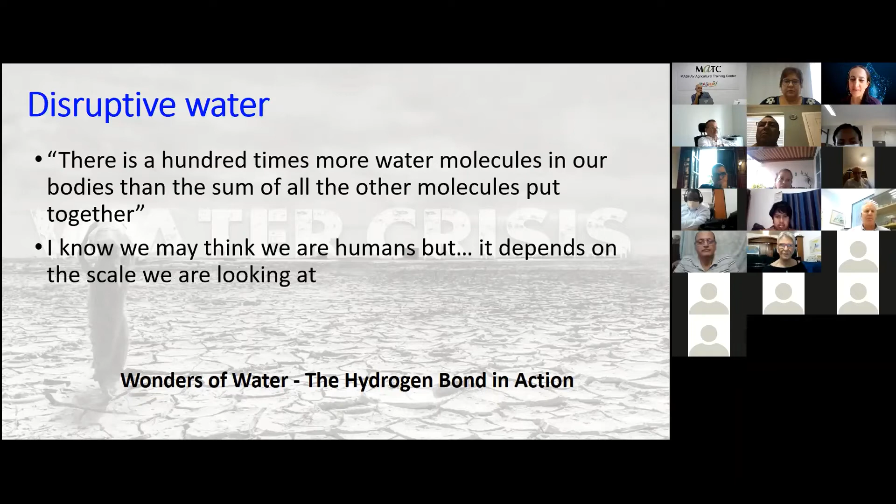So how is this related to water technologies? I would like to go through some path with you to discuss how all these things are actually related when we think about water innovation. So, what is water?

And I'm sure that if I ask the audience here what is water, probably most of the people will say H2O, right? I think so. But I would like to show you something else very soon, and I will return back to the answer to this question. And water actually has endless dimensions. It's a beautiful thing. But when we think about the approach to sustainable water, what does it mean?

Well, everyone is talking about getting out of the box. But again, what does it mean when we think about water technologies? What's getting out of the box? What is innovation in the water arena? Just assume that you can actually imagine and dive into the three-dimensional concept of water and feel, understand, and imagine what water is. Can that actually help us to understand how to develop better water technologies?

How is a single molecule of water related to the millions of water molecules that we have when we drink a glass of water? How is it related to the concept of thinking of water? And so water interacts with each other through hydrogen bonds, and water is a universal solvent, and also water has many types of capabilities. So how do we harness these qualities in order to purify water? And this is actually a really big question, because when we talk about water innovation, what do we actually mean? What is our goal?

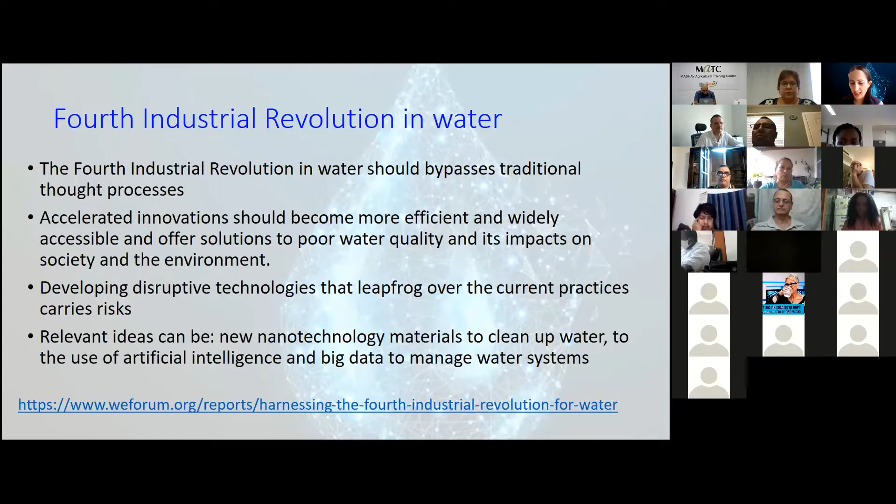But there is a problem. Why? Because I'm a scientist, okay? I research in the lab, we do science, we publish papers, and we can invent many new materials and many new technologies that we think could be implemented. But if we look at reality, most of these technologies are not scalable, not affordable, and not relevant to point of use applications where they're mostly needed.

So what does innovation mean? Well, when I think about innovation, I think that we need to talk about reactor design. So how do we take all these scientific concepts into a system? And this is where we have a huge gap, okay? We have a really huge gap.

I recently did my sabbatical at IIT Madras in India, and I quoted something that Professor Pradeep said, that affordable clean water is a problem of advanced materials. But I would say that it's not just a problem of advanced materials, it's also a problem of all of these advanced ways of thinking, integrating them in a smart system, in a system that can actually work. So these are the gaps that we need to solve.

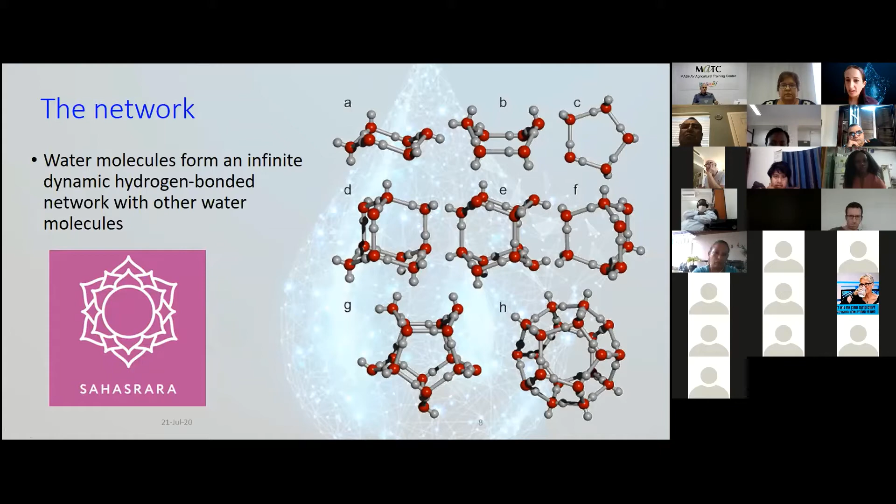Now, you remember that I asked you, what is water? Well, we're used to saying that water is H2O, but if we look at all these drawings, water is numerous H2O molecules that are bonded to each other through hydrogen bonding. And when we drink a glass of water, we don't drink H2O, we drink tons of H2O molecules bonded to each other, and water is the universal solvent. So all the different chemicals that pass through the water dissolve inside the water. So we know that all this happens, but how does it help us to purify water?

Well, let's look at the human perspective. When we think about humans, we can drink only a very limited quality of water. So most of the water types we cannot actually drink. So what does it mean when we think about water technologies?

So what do I plan to talk about here? It of course depends on the time and how we proceed. I want to talk about contaminants in water, and do we have a chance to really purify water? I want to talk about the impact of climate change on water quality.

And I also want to talk about new technologies that are related to sewage treatment and data science, new materials and new light sources. So this is my plan for today.

So I'll just move. So when we think about contaminants in water, well, when we drink a glass of water, and I'm showing you this glass of water again and again, but what do we actually have in this water? Well, water can be transparent, but it can actually possess many things like arsenic and pesticides and nitrates and hormones and fluorides and pharmaceuticals and microbes and viruses and bacteria, protozoa, and the list doesn't end. So do we actually have a chance of purifying water in a way that can actually be good for us?

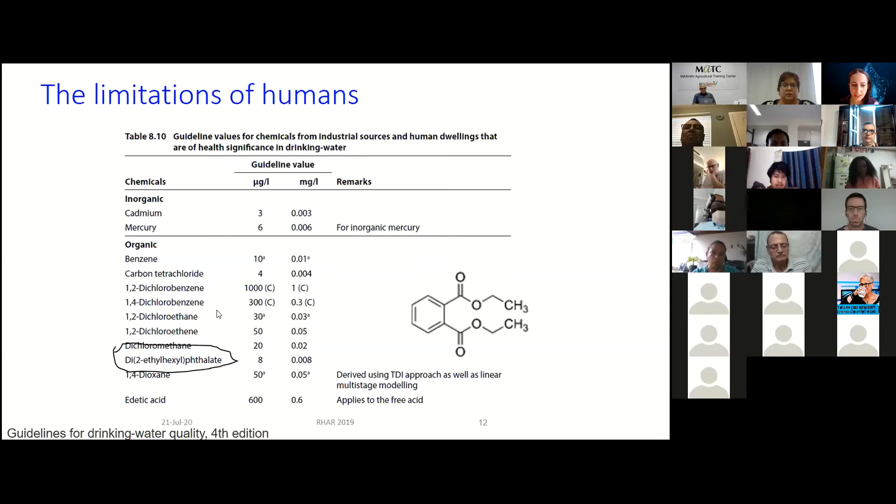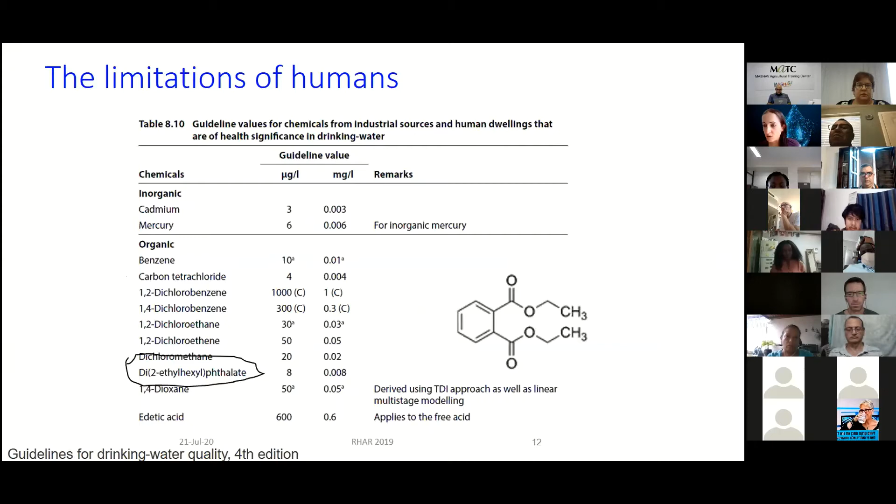But look at this chemical. So do you see this chemical? It's called phthalate, and this is how it looks. But this is only one out of an endless list of chemicals that are not supposed to be in water. And actually, the concentration is supposed to be 0.008. So where do we find this chemical? Well, we find them in open dumps.

And what happens in open dumps and solid waste, even managed solid waste facilities, we actually have chemicals that leach out of the garbage, and they infiltrate to the groundwater. And we all know about plastics, right? So when we talk about plastics, most of us are worried about the plastics, the microplastics, the nanoplastics. But what about the hidden plastics, those dissolved plastics that actually dissolve from these bottles? Okay, so what about these?

Actually, no one talks about it because there's not a solution for all those chemicals that leach from those plastics into the water. And the technology to remove them is very expensive. So what happens with all these things that are really a major concern, and these chemicals are potentially carcinogenic? So what happens with all this? And it's not even measured, but we know that the plastics that we drink from actually result in more of these chemicals in the water. So there's a huge process.

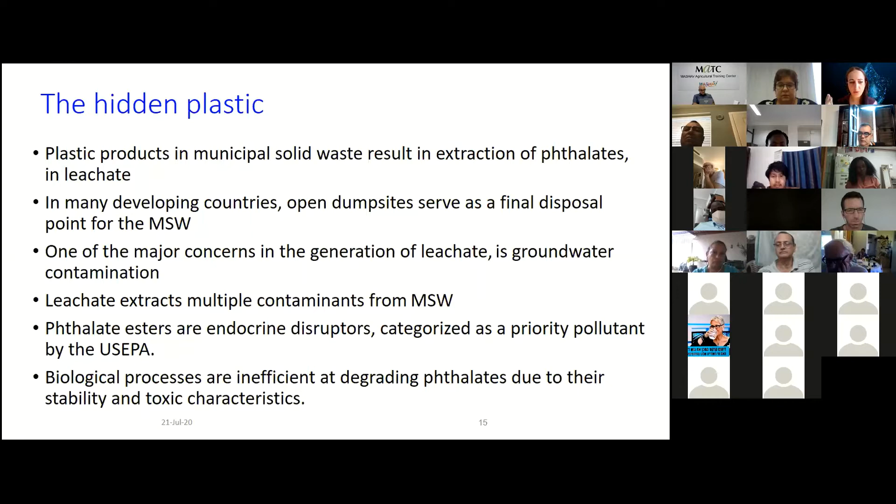And when we look at the technologies to treat those chemicals, they're very expensive technologies. So we need to use, for example, advanced oxidation, ozonation, reverse osmosis, all these big names in order to remove those chemicals from the water. So we are actually in a big problem, because I'm not talking only about the bacteria and the viruses, I'm also talking about the chemicals that are present in the water. And why do I say that we don't have a chance? Because what are the chances of removing all those contaminants from the water? So that's a big question mark.

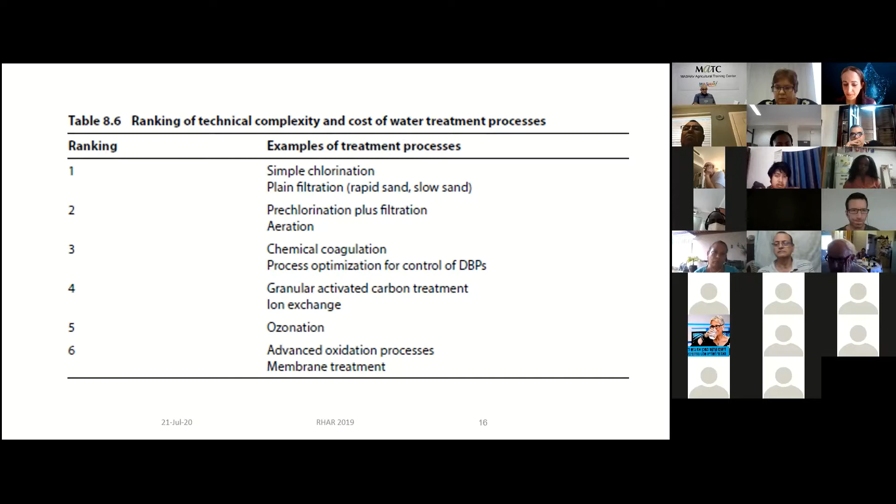And I want to talk now about a different aspect. And this is in light of global climate change. When we talk about climate change, we talk about many things. We talk about water availability. We talk about the climate itself. We talk about biodiversity. But we don't talk so much about sewage and about water quality. And I just want to show you a few things that we need to look at when we deal with water.

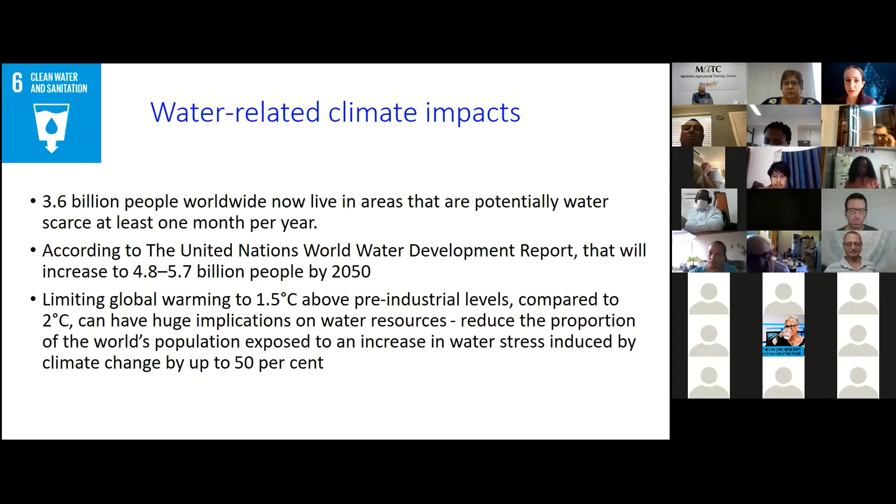So how do we manage water in light of these issues? And what do we need to do to be more water resilient in light of the changes that are happening currently in the world? And so I actually want to emphasize the issue of quality. Throughout this lecture, I will talk mostly about water quality, not water availability, because water availability is something that we notice. We notice the storms, we notice the floods, and this relates to water availability.

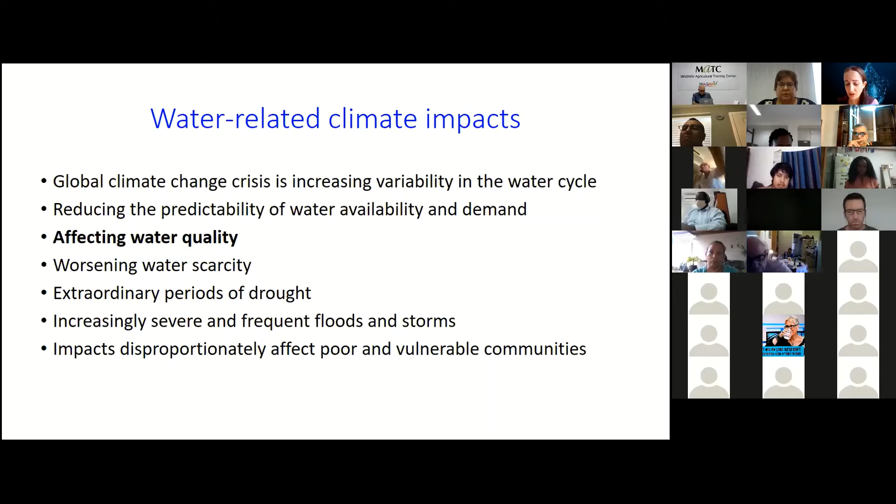But my argument is that when we have less water, the quality is actually worse. So how do we deal with water quality when we know that humans can drink only a really narrow range of water quality that is healthy for us? So what happens in light of all these issues? Definitely climate change will have an impact on our water quality. And I just want to look a bit at wastewater treatment plant design.

So we know that greenhouse gases are emitted during the treatment of wastewater, and these relate to carbon dioxide, methane, nitrous oxide, and all these have a global warming potential. If we look at the global warming potential of carbon dioxide, methane, and nitrous oxide, the ratio is 1 to 28 to 265. CO2 is emitted from aerobic respiration, and N2O is released during nitrification and denitrification. So all these things are happening in a wastewater treatment plant, and we have release of all these gases.

And we really need to look at the impact of the release of those gases in relation to global climate change. So this is the case in the Hudson River in the US, where they found that when they have excess sewage and the sewage reaches the Hudson River, they have far more greenhouse gases, CO2, emitted from the river. So this is one thing to think about.

And if we look at different things, when we use wastewater to irrigate crops, we increase the surface area of the wastewater in contact with the atmosphere. And with this, we also have release of gases to the environment. So these are things that we must look at. We cannot neglect the impact of sewage on water quality, but also on the release of greenhouse gases.

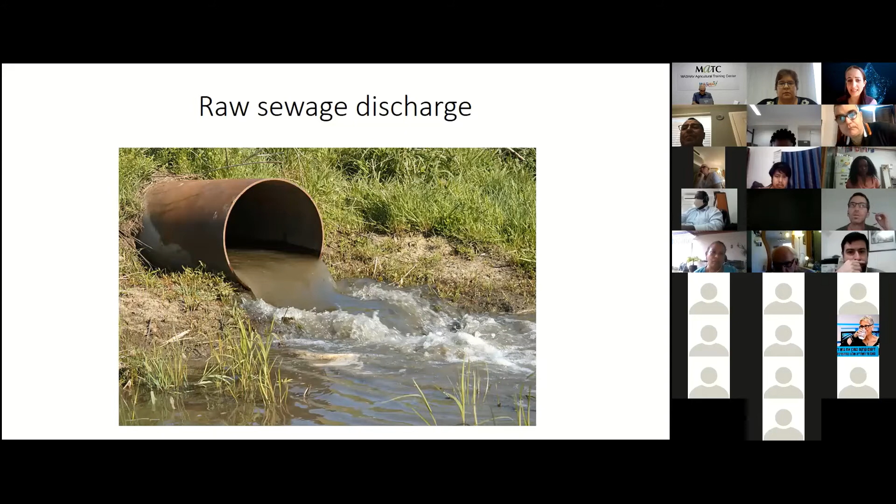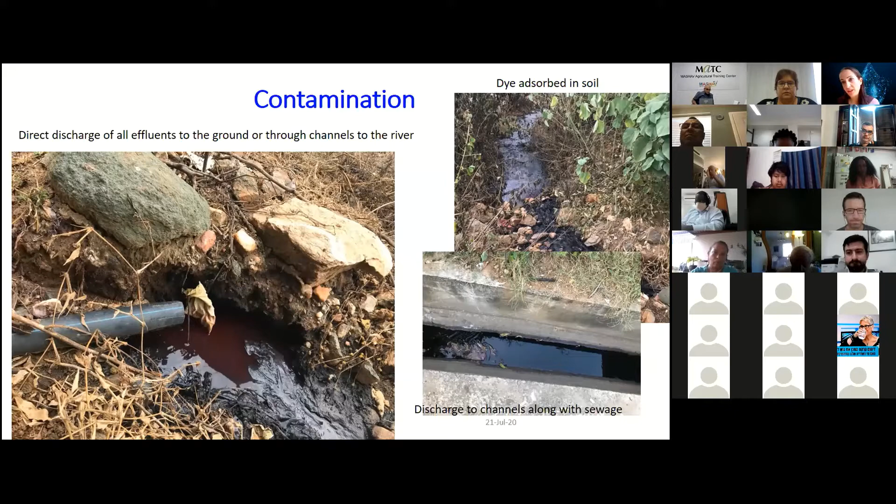And these contaminations are very much happening all around the world. The sad statistic is that almost 90% of the sewage is actually not treated. So it's discharged to the environment with a huge surface area and results in release of those greenhouse gases to the environment. In addition to that, there's also the issue of greenhouse gases in manholes.

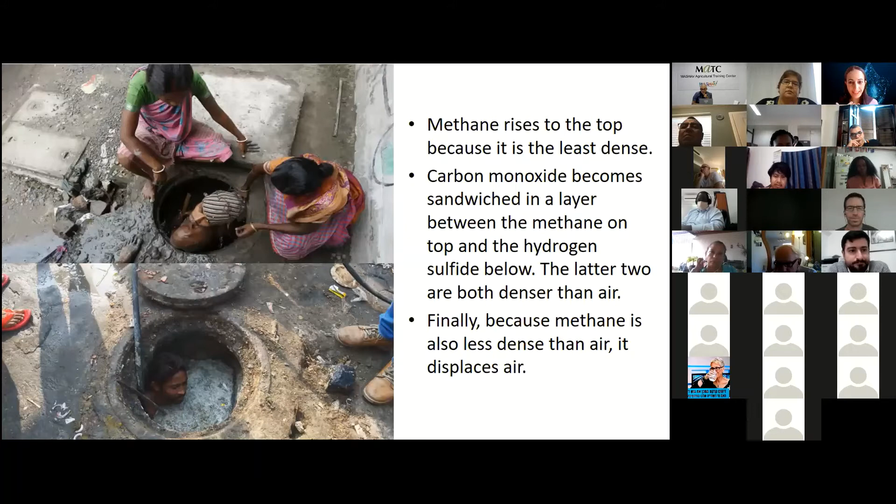Basically, methane rises to the top because it's the least dense of all the gases released from sewage. Then carbon monoxide, so we have methane, then carbon monoxide, and then hydrogen sulfide. So we have all these gases layered in sewage manholes, and with methane, for example, it displaces air. And so when methane is being breathed, it can result in human death.

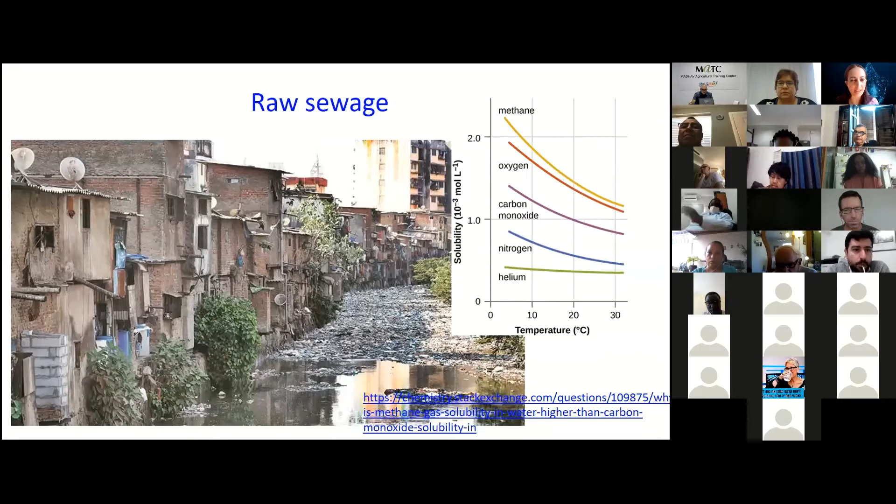And when we look at raw sewage, this is a housing area, and this is raw sewage mixed with water. Again, the gases released here are really potent and are a result of sewage that is not being collected, not being treated, and released to the environment. So we do need to think about these things. When we talk about water, water is never only water. Water is also sewage, and we need to look at it when we talk about water management. It's supposed to be always water and sewage management.

So I want to just show you a small example of how wastewater treatment plants can result in better management of their sewage. For example, if we look at a standard activated sludge treatment plant, it actually consumes energy, okay?

So the energy that is consumed in a sewage treatment plant is about 3.2 kilojoules per every gram of COD, which is the chemical oxygen demand, and this is a parameter that relates to the organics in the sewage, okay? So potentially the organic compounds in the sewage have potential energy that can be harnessed to treat the sewage instead of using fossil fuels. So this is a way to reduce the release of CO2 and other gases to the environment.

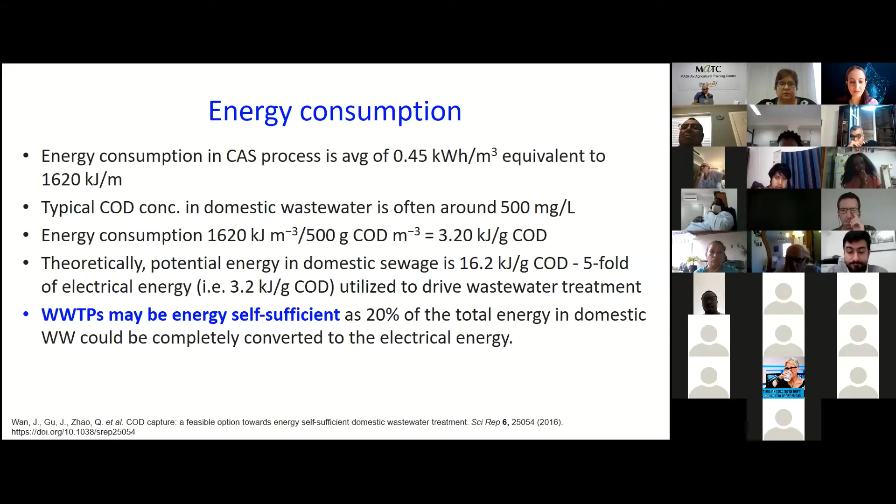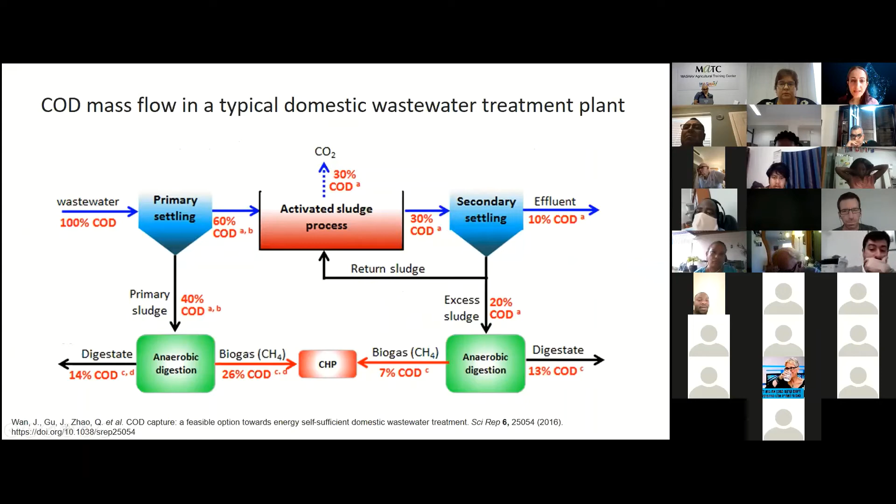And just by looking, for example, at this, I'll just talk about it really shortly, just to emphasize my point, even if you're not a sewage engineer. So this is a standard sewage treatment plant. And we can see here that we have 26% and 7% of the chemical oxygen demand in generation of the biogas, of the methane. So we can actually get energy by generating biogas from the sewage, okay?

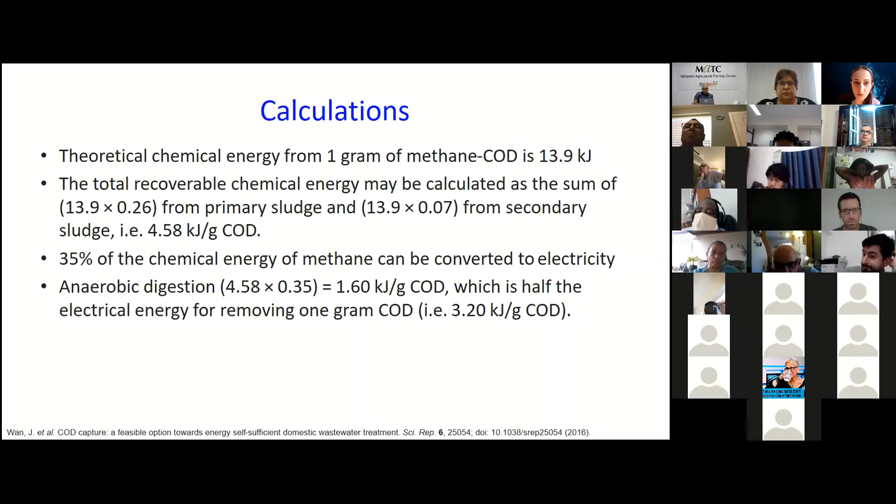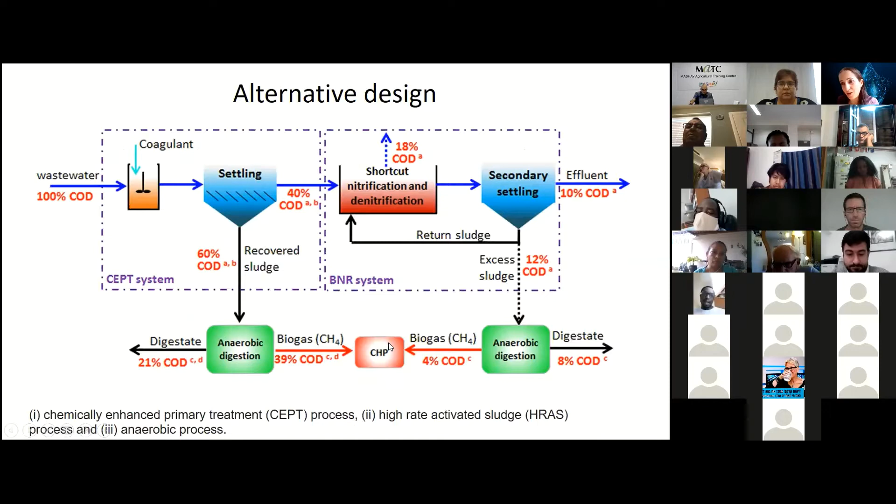But if we improve our sewage treatment plant, and this is only a very simple case where we're adding an alternative design, adding a coagulant that results in an increased percent of chemical oxygen demand into the biogas formation, then we result in more biogas formation, and that helps provide the energy source for the wastewater treatment plant.

This is another example, an anaerobic membrane bioreactor to treat sewage. In this case, we're only removing the organics, but we're keeping the nutrients in the sewage. So the nutrients can be used to reduce the amount of fertilizers that we need when we irrigate with this treated sewage for agriculture irrigation.

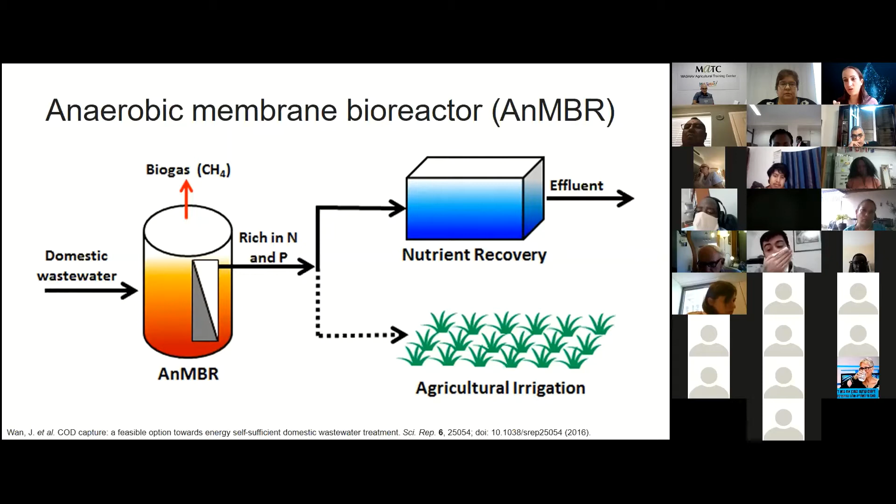So there are many ways where we can combine cross technologies and look at the big picture on how technologies can be used to reduce the amount of chemicals used, reduce the amount of energy used, and reduce the amount of fuel used to treat the sewage. So this is one way of looking at sewage.

In addition, we need to look at diversity. Do we actually need to treat all the water to a certain level? It depends on the application. And this is also another thing that we need to look at. So we need to combine the people that treat the sewage with the people that use the sewage for agriculture irrigation.

Do we really need to remove the nutrients from the sewage? Do we really need to remove all the organics? Do we really need to generate biogas? And if we generate the biogas, how can it be used back to reduce the fuel consumption in the treatment of sewage? Then we also need to look at the industrial wastewater.

So industrial wastewater can also be a resource if we think about it a bit. We have in the industrial wastewater tons of contaminants. So what can we do in order to close the cycles, in order to have an affordable technology that will be more sustainable?

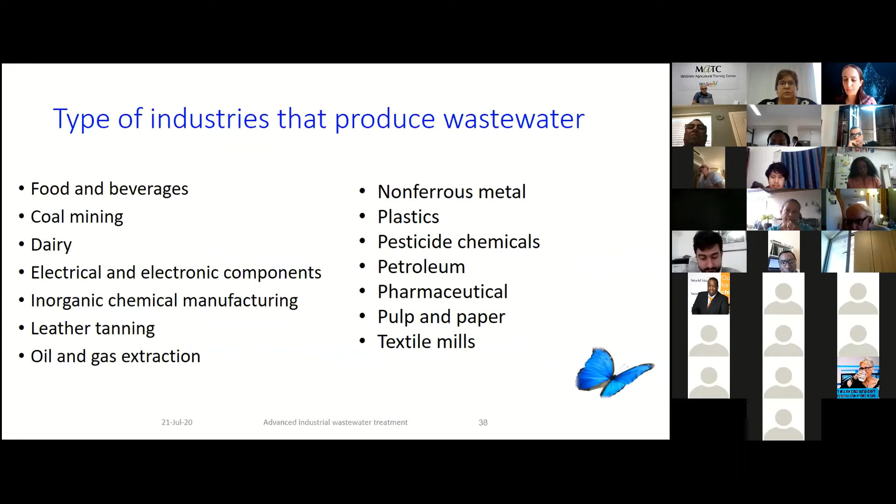Okay, and I would also like to talk about the impact of climate change on emerging diseases. Actually, 25% of human-related diseases are caused by environmental changes. So climate change can give rise to these disease-causing agents to thrive. So this is also an issue that we must think about.

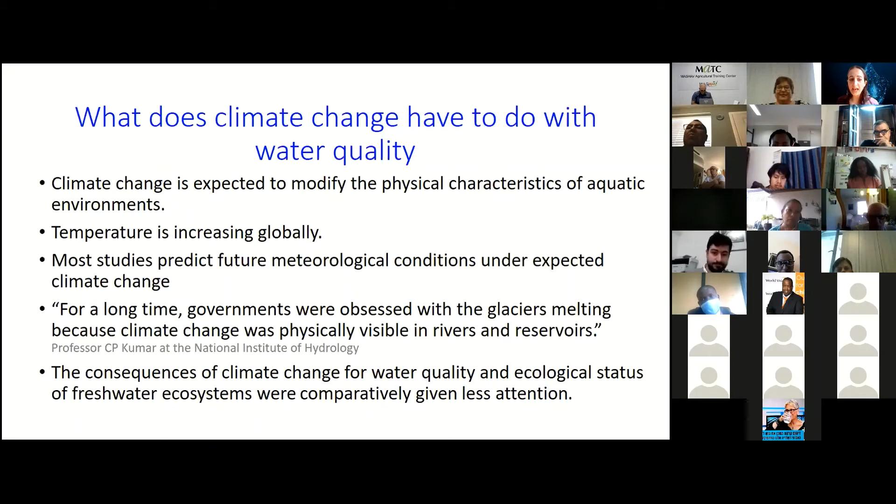I would like now to move towards water, because I talked about sewage. I would like to talk a little bit about water, and emphasize the issue of water quality. We all know about climate change and how it impacts floods all around the world. And definitely when we have floods, this also impacts the water quality.

For example, when we have a flood, we have a mixture of different water qualities. You can see this water that looks like chai. It's brown water, which resulted from anaerobic conditions that increased metal dissolution into the water. So these things happen in light of climate change.

So climate change does not only impact the availability of water, but also the water quality. And we really must look at that, and not only the water, but also the sewage. So we need to look at water availability, water quality, and sewage. We need to look at all of these things and not separate them, because the separation is actually not real.

So we're also doing a lot of work in India on trying to predict water quality. And the idea here is actually to develop affordable and low-cost sensors that can be used to get more data, because data is actually our way to understand what's happening with the water.

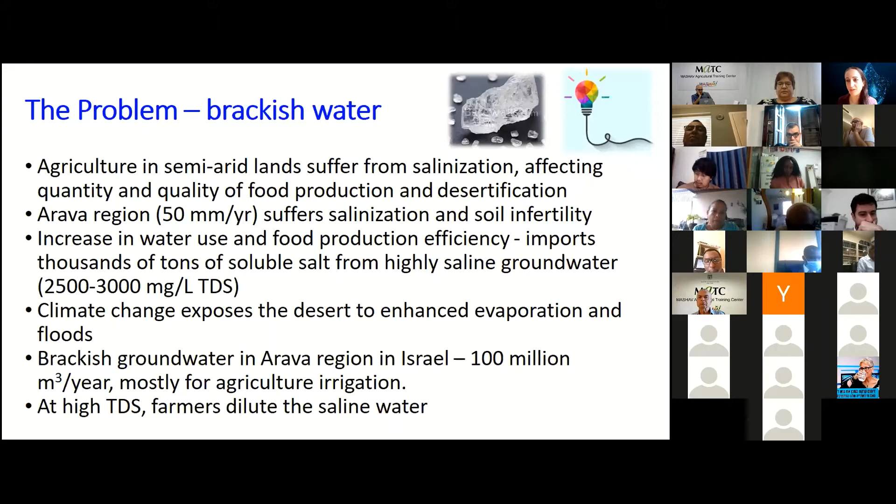So my argument is, again, when we have less water, the quality is getting even worse. And the problem of brackish water: overpumping results in brackish water. In Israel, for example, we're a semi-arid country. We do suffer from brackish groundwater, which results in impact on food production and on desertification. So these issues must be tackled because the amount of soluble salts does increase, and humans cannot drink water that has a high concentration of salt.

So it's easy to dissolve salt into water. It's more difficult to separate salt from water. We can definitely do it, but it's expensive. So these technologies are actually expensive.

So I want to return back to dynamics of water innovation. When we talk about water innovation, what are we actually talking about? Are we talking about high-tech technologies? Central water treatment technologies? Point-of-use technologies? Reactor design? Are we talking about maybe giving the basics of having a few liters of water to drink? What are we talking about?

And I would also want to talk to companies, to the business people, because I feel that they are not, I mean, maybe it's both ways, but if the scientists, together with the business people, together with the NGOs, can talk together, then by using the different thought processes we can actually improve the water quality and its quantity as well. But we do need to find a common language. We do need to talk to each other.

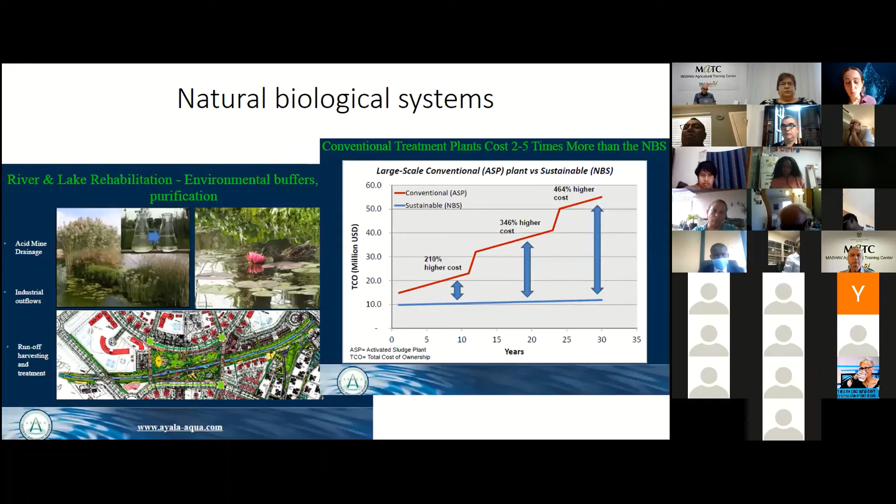We need to, in some cases, look at natural biological systems to solve many problems. It's not always about intense treatment technologies. We can work on improving things—for example, this is a project we're working on, improving sewage ponds using simple supports where microbes grow, combining algae and microbes. We saw that the COD removal of these sewage ponds was actually much better. So we can do these things—we can think of affordable ways to improve water quality.

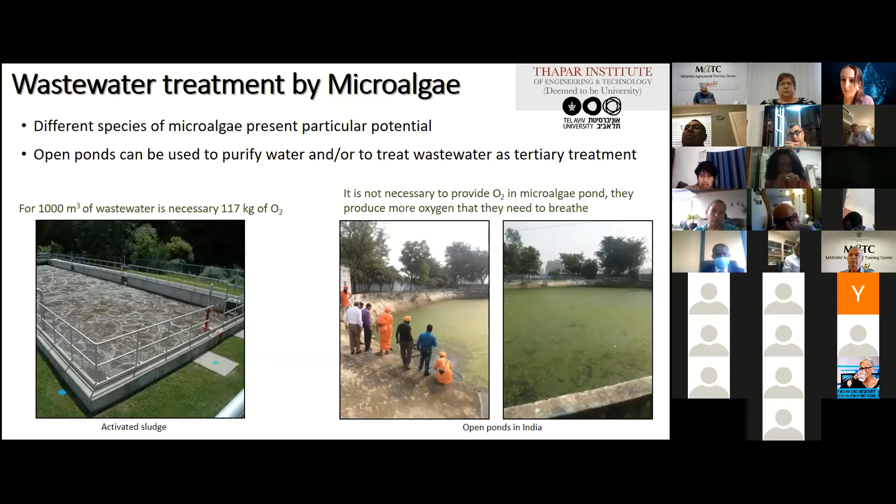And definitely we need to look at the circular concept. We cannot isolate water, we cannot isolate sewage, we cannot isolate climate change. We need to look at all these different things together and see how one process actually benefits the other. I have just a few more minutes, about 5, which I'd like to use to talk a bit more about my research in my lab.

One of the things we're developing is disinfection technologies using LEDs. We all know about light emitting diodes, used everywhere, very common. But these LEDs can be in different wavelengths—they can be in the ultraviolet range—and what we found is that when we combine different lights from different wavelengths, they can improve the disinfection ability.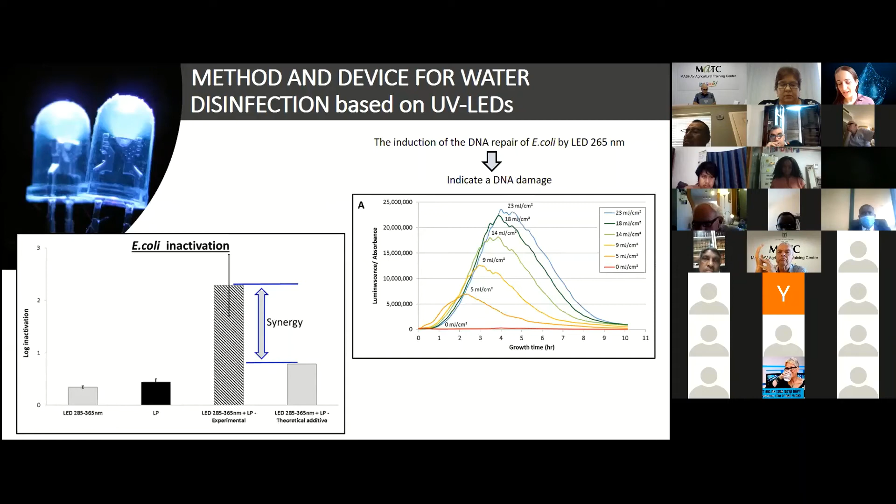So when I'm talking about thinking differently, we can combine things to improve our treatment technology. With this technology, we're now working on developing an off-the-grid disinfection technology based on LEDs that does not require electricity at all and does not require chemicals. So it's chemical-free, electricity-free, off-the-grid LED technology based on solar power, on the sun. This is one of the goals we hope to develop.

Another thing we're working on in the lab is developing aerogels. Aerogels are really cool materials that are actually 99% air—only 1% mass, all the rest is just air—and that's why they're used as insulators. These materials are really cool and nice, but if we look at them this way, they're expensive to make. So how can we actually use these aerogels and prepare them from affordable materials?

And also prepare them from different biomasses present in the environment, and encase them in a reactor that can be used for point-of-use small systems. This is an example of questions we're trying to solve. This is an example of how aerogels can absorb dyes—we collect the dye in the sponge, and then we can purify the water in a really simple way.

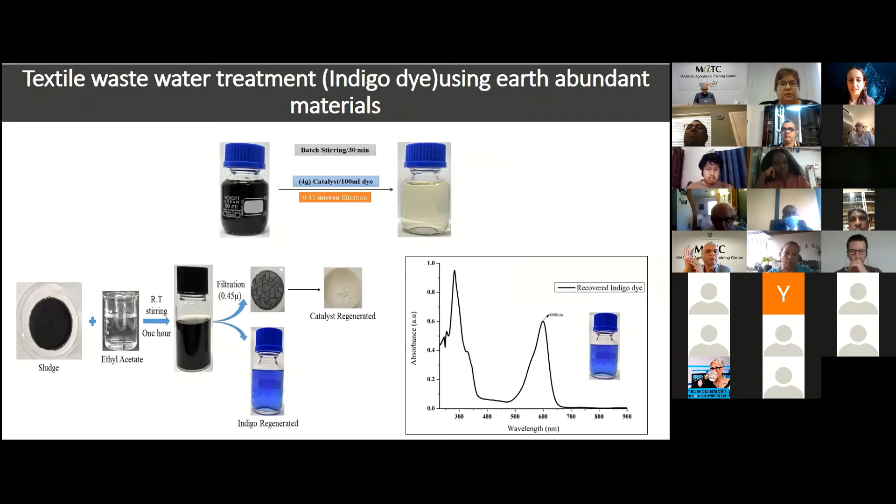It can also relate to other types of dyes. This is, for example, using an earth-abundant catalyst in order to solve textile dyes.

We're also trying to look at smart sewage pits. We know a sewage pit is a pit that collects the sewage, but what if we make our sewage pit also our treatment technology? We're now trying to develop aerogels that can absorb ammonia, and layer different aerogels with different qualities in order to prevent contamination of toxic gases vented through the sewage pit, and also absorb contaminants to decrease their leakage to the groundwater.

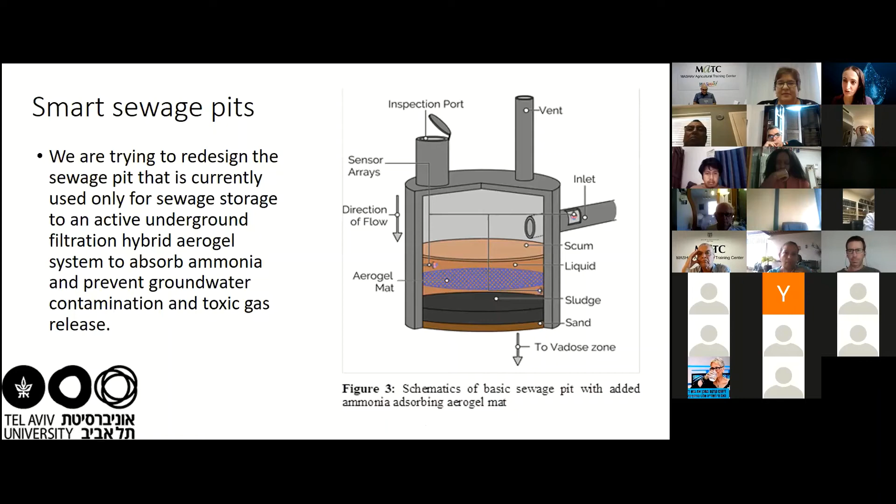In addition, the last thing I want to talk about is data and data science. How can data science improve the operation of a wastewater treatment plant? This is a project we're doing together with Mekorot, the Israeli water company. We have a huge number of parameters collected, but how do we use trends, numbers, and all these things to understand how we can improve the treatment of sewage? We want to find anomalies, we want to predict.

We want to know ahead of time when we're going to have a process upset. Because what happens today, we have a fire and we're putting out the fire. So this is what we're doing: we see a problem and then we try to solve it. What happens if, due to this enormous amount of data, we can predict the problems, or we can reduce the amount of data that is being collected?

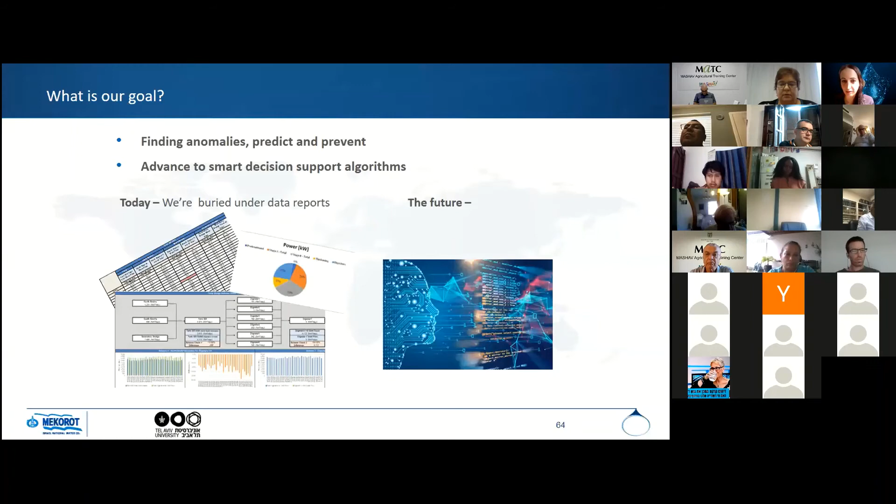So that's when we combine with experts that deal with data science, with artificial intelligence, in order to develop algorithms that will really help us make smarter decisions on our treatment of a sewage treatment plant. So for example, we're working on 2 case studies. One of them is looking at microscopic observations of the activated sludge sewage treatment plant in order to understand, can this microscopic observation alert on bad effluent quality? And the idea is to predict before we have the bad effluent quality.

So then the idea is actually to look at all this data, and by using data science, look back at all the data when we had good effluent quality and when we had bad effluent quality, and then try to predict, not by human prediction, by machine.

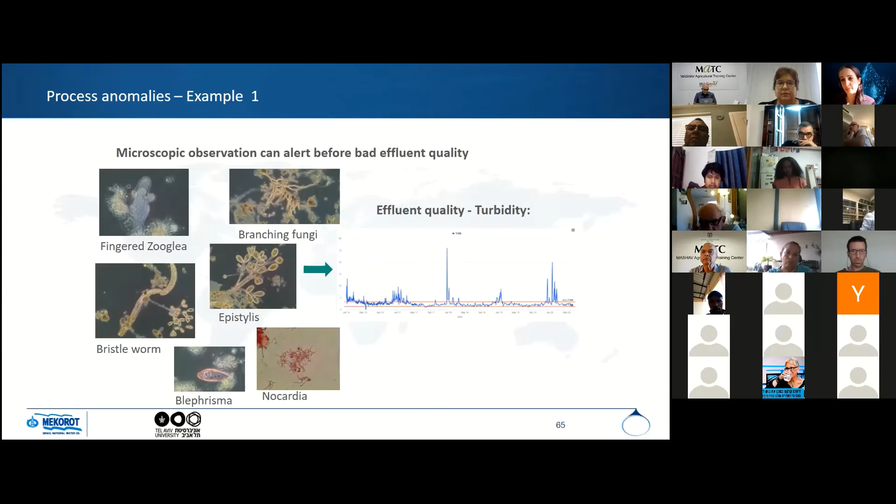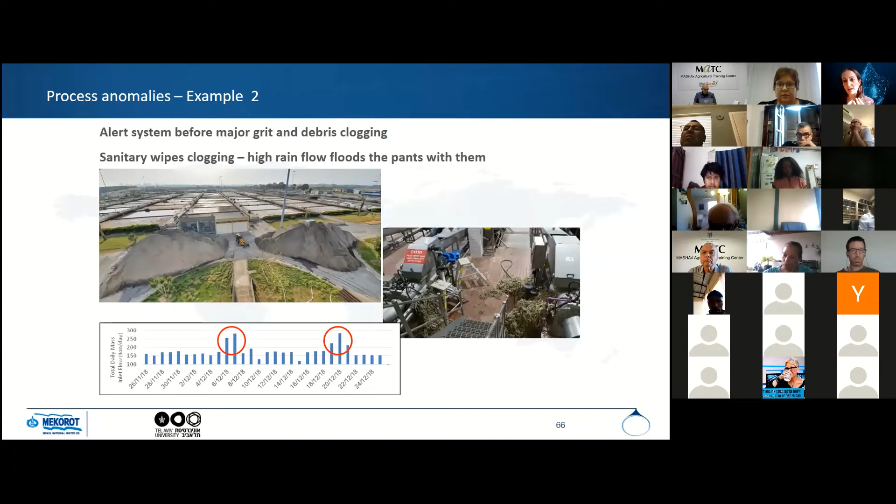And in addition to that, another example where we're trying to look at process anomalies is to alert before we have clogging. Clogging can result from sanitary wipes, but it can result also from debris. Both of these can actually clog a sewage treatment plant. And we're trying to understand the correlation between the type of clogging and to have a possibility to actually predict. And so these tools can actually benefit humanity and smart sewage plant control.

And with that, I would like to end, and I hope that I was not talking too fast. I do have the tendency of speaking really fast, and I hope my students, when I teach them, do not suffer. I really want to say many things in a relatively short time, so I hope it was clear. I'm almost used to talking by Zoom, but I do look at your faces during the talk. So thank you very much. Thank you.

Wow, thank you very much, Hadas. I found it fascinating. I started thinking maybe I should go and learn at the Faculty of Engineering. Maybe you'll be my lecturer.